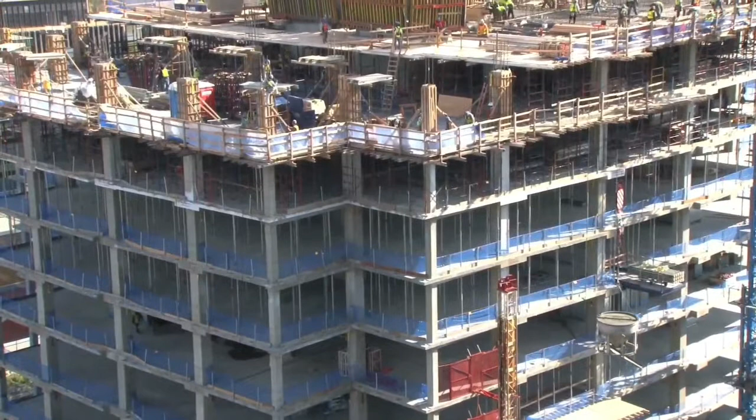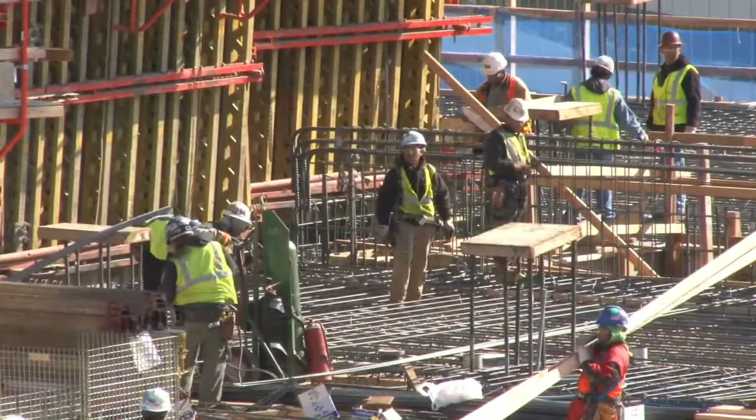As the world's population continues to grow, we're faced with the need for faster development and rapid construction on a massive scale. The building design and construction process has relatively stayed the same for hundreds, if not thousands of years. An architect or designer would create a vision for a structure, a civil engineer would create all the necessary supports and functions, and a crew of builders would ultimately construct the house or building. It seems simple, but one thing that the tried and tested process doesn't have on its hands is time.

When time and efficiency become the driving constraint for construction, like what's being seen in areas experiencing rapid growth, oftentimes the only solution is manufactured housing lacking in originality and architectural beauty. There is a place for a double-wide or single-wide concept of manufactured homes, but adapting to the mass population has never been the intended use.

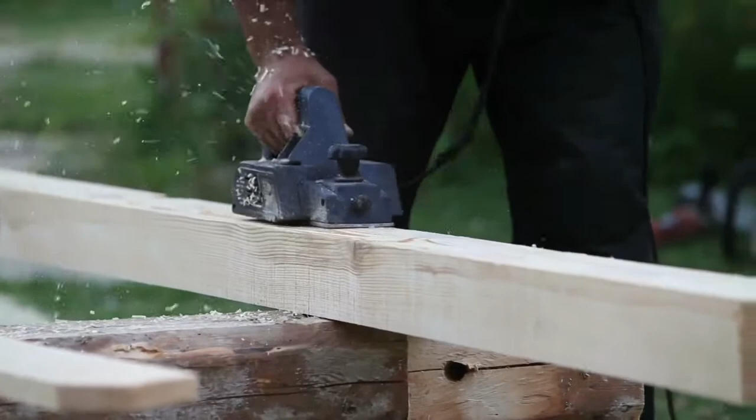Rather than this form of housing manufacturing, the construction, design and construction industry will shift to a more wide-scale mass production industry. We're already seeing trends of this emerge, like when China had to build a hospital in record time. They used prefabricated wall structures leaned up together to create one building as fast as possible.

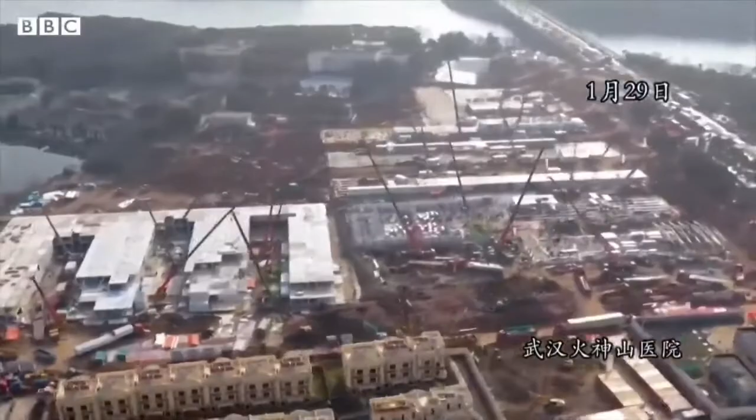That said, the buildings traditionally made in these prefabricated structures are rather boxy and not very interesting, but the industry will soon come to see that one can still be focused on architectural beauty and originality, while the processes can be driven by manufacturability and speed.

Much like how 3D printing and other additive techniques are infiltrating the mechanical engineer's world in product design, so too is rapid prototyping infiltrating the construction industry. There are any number of ways one can create a structure using scalable components.

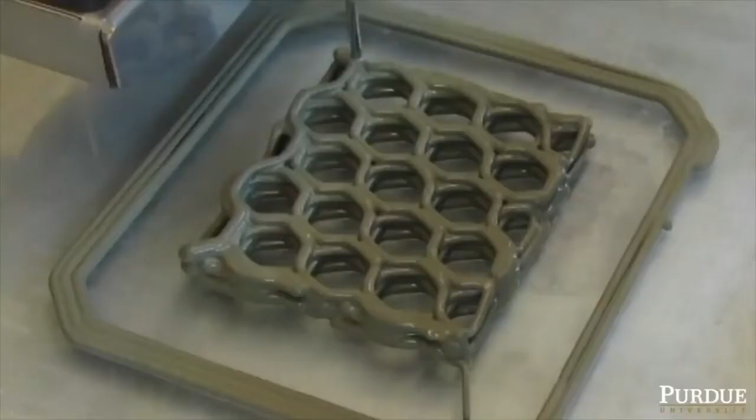Buildings can utilize large-scale concrete or brick house 3D printing machines, although their practicality for widespread use is currently still lacking. What the world will start to see is more of a system of construction building blocks, a standard, if you will, for fully custom construction housing, all using similar pieces.

This slowly emerging trend in the construction industry is further picking up speed. We're beginning to see skyscrapers built in a matter of days and weeks, as opposed to years using traditional methods. The trend is becoming pre-manufactured, somewhat uniform structural sections used in large-scale construction projects.

Most notably, we see these pre-manufactured part methods being used in places like China, like we mentioned before, where the population is experiencing exponential growth.

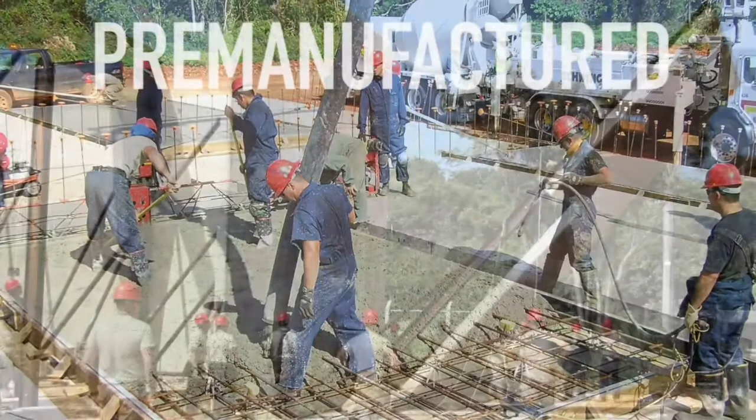For the better part of history, construction has relied on the trades, bricklayers, masons, builders, and many others to bring an architectural design into fruition. Not to say the trades are dying, in fact quite the opposite. But rather, when time is a driving factor in construction, there simply isn't enough time to rely on human tradesmen.

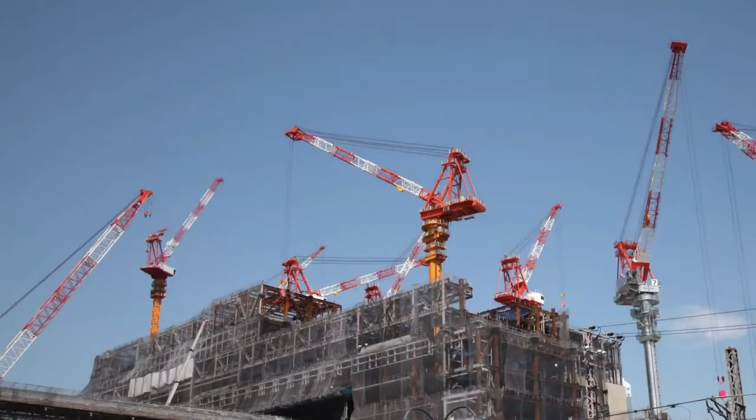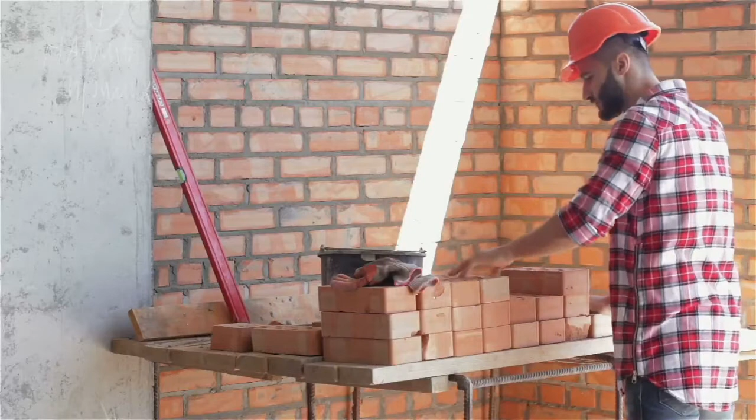Engineers and builders are turning to construction techniques like tilt-up building, where walls are cast in large slab sections on the ground and lifted into place. This technique allows sections hundreds of feet in length to be raised in a matter of hours.

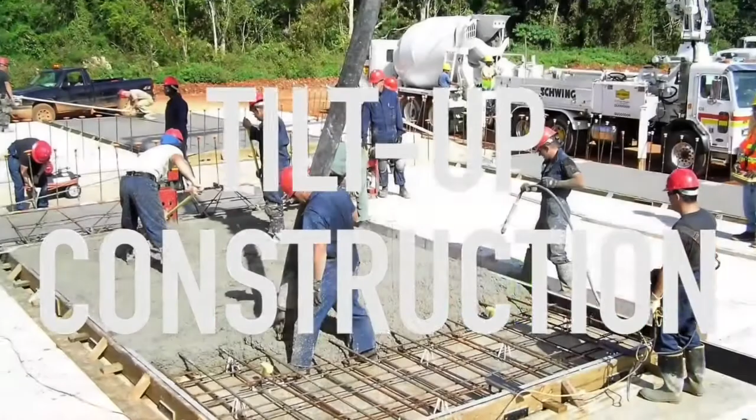The key to understanding mass production techniques being implemented in building construction is that even though time is becoming a driving factor, buyers still want originality. To adapt to this, construction techniques are using styles similar to how one might play with Legos. There are standard sections and methods that ultimately fit together easily to create a greater structure, but therein can be customization.

As large-scale 3D printing techniques for buildings mature, the industry may start seeing more designers utilizing these methods. In terms of feasibility, additive techniques have been proven on a small scale, but sizing up the methods to the size of a house or office building is another matter entirely.

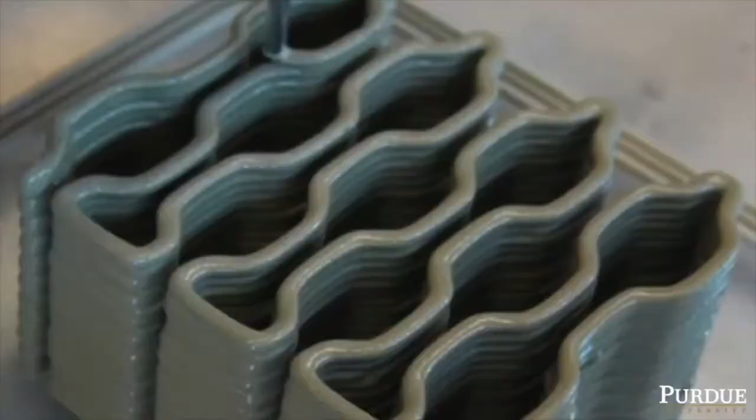Much like how the Industrial Revolution created a variety of processes that sped up the manufacturing industry, so today we're going to start seeing a construction revolution, which is speeding up our ability to engineer dwellings to meet the growing population and need for new structures.

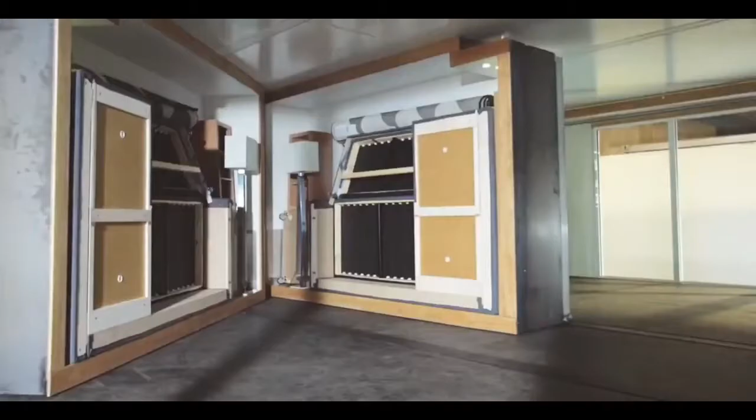The residential new construction sector, which includes single-family as well as multifamily, is forecast to slow down by the early 2020s. The multifamily industry projects the slowdown to be at least 30% of the total starts.

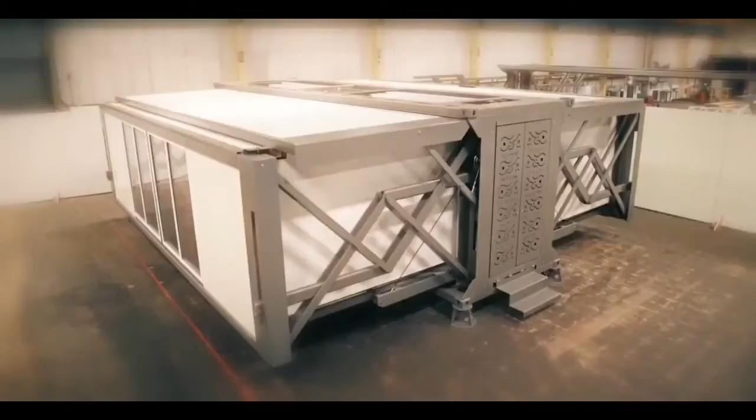While we're all happy that starts continue to grow at least 5% every year, loading our manufacturing lines, the trend is about to change. One forecast to keep in mind is that the repair and remodel (R and R) sector will continue to outpace new construction, as there continues to be untapped potential.

As you put together your strategic plan, make sure you're preparing for the new construction softness by immediately putting additional resources on R and R.

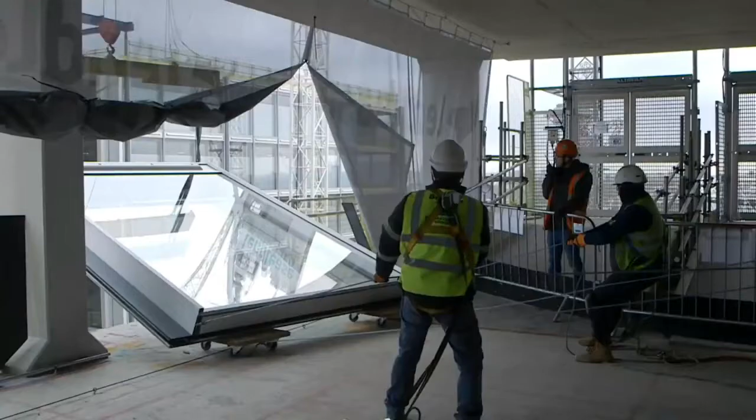You have no one to blame if you don't listen to and address the looming signs. There are 9.6 billion reasons we should be thinking differently about the housing industry.

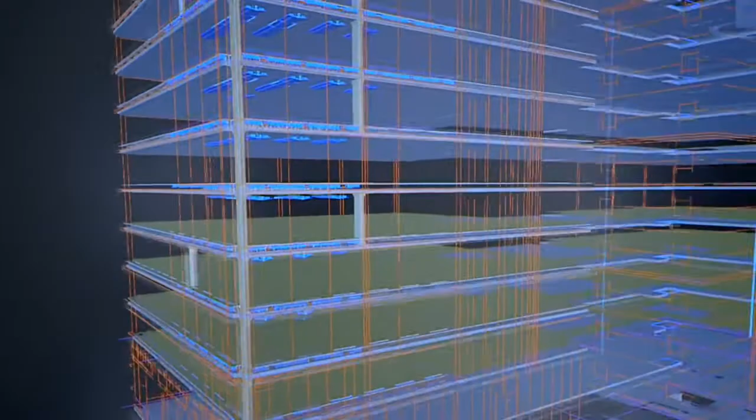By 2050, it's projected that more than 2 billion people will be added to today's world population. In the US alone, our population of 328 million is forecasted to increase every year by 2.3 million people until 2030, surpassing 400 million sometime shortly after 2050. To house these additional people, we will need nearly 800 million more housing units across the world, assuming a current 2.6 people per unit average. In the US, the 72 million incremental population growth will require 27 million more homes, not including homes that deteriorate to be non-occupiable within that roughly 30-year timeframe.

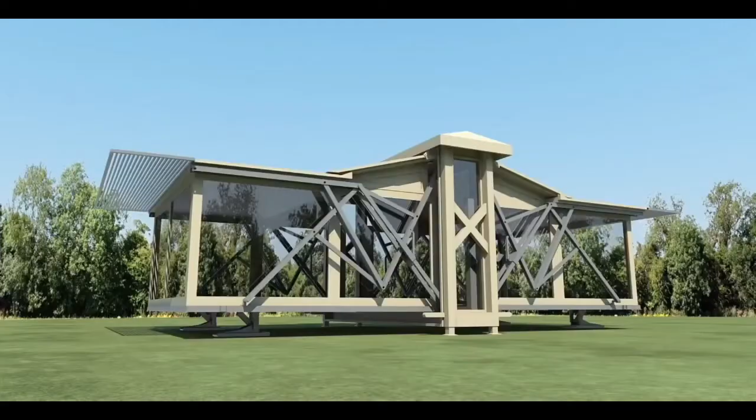Today, the US struggles to find enough labor to even build 1.3 million homes and remodel several million more. And we currently struggle to find the land for builders and developers that can afford to develop it.

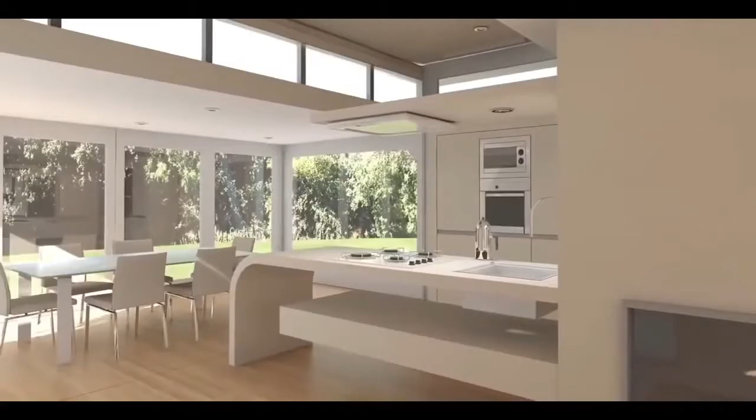I learned early in my career, focus on what you can control, and it will make solving the challenge easier. We know there is nothing we can do about the population growth, unless we take China's approach. That's why we must address the approaching housing shortage and make it part of your long-term strategic planning process, so you can address how to leverage the opportunity it will most definitely create.

Land is available in certain locations. The industry just needs to identify how people want to live. It's forecast that multifamily, especially in urban living environments, will continue to grow. By definition, this means that multifamily housing will increase given the landlocked areas available in urban locations. Experts forecast that mix to continue and perhaps grow with the changing demographics on both sides, including more boomers downsizing to walkable communities and more millennials wanting less square footage and walkability to shops and entertainment.

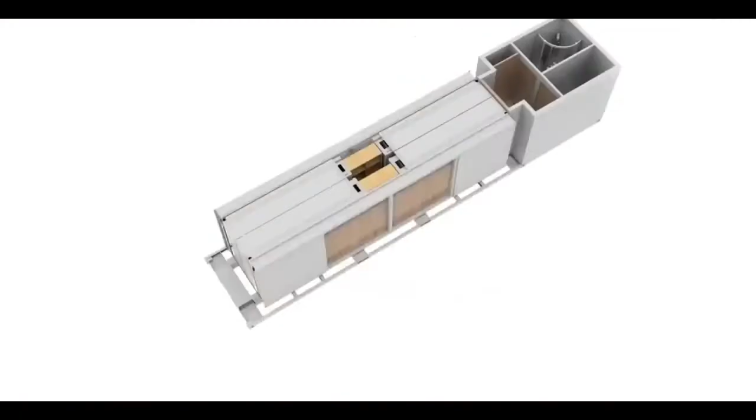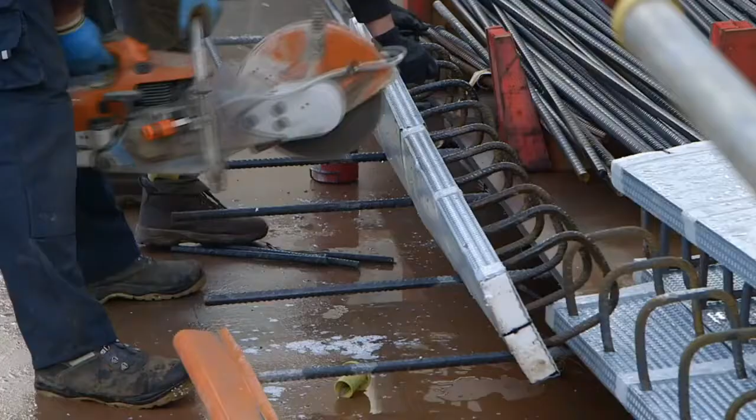There is immense innovation happening in the construction industry, and with new technology hitting the market constantly, there is a large opportunity for growth and an increase in productivity. Various roadblocks keep the industry from adopting these technologies more readily, but their hesitation can largely be attributed to the upfront investment that comes with implementing new technology.

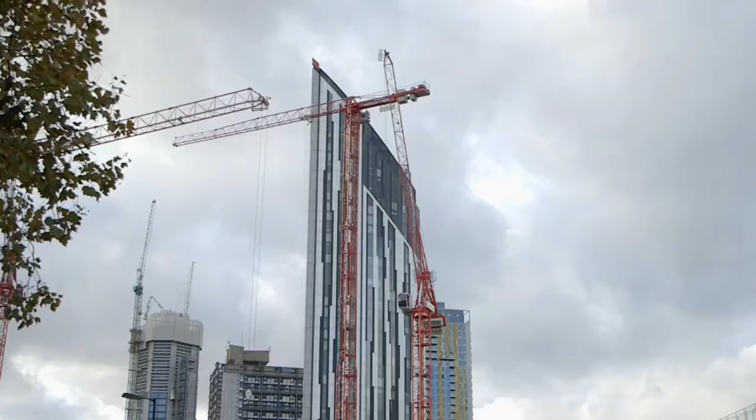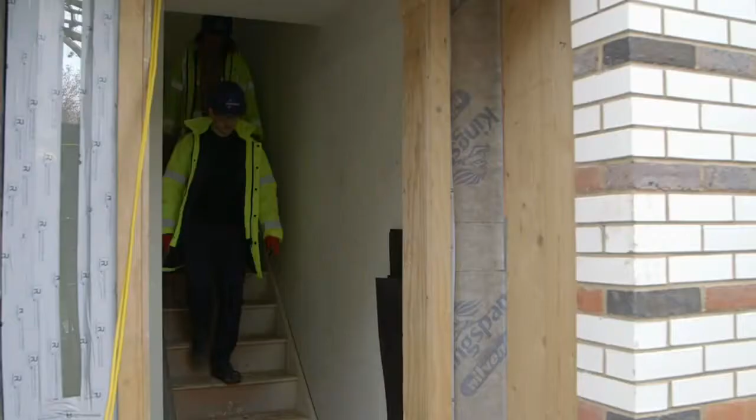Within 10 years, according to our estimates, full-scale digitalization will lead to huge annual global cost savings. For non-residential construction, those savings will be $0.7 trillion to $1.2 trillion, 13% to 21%, in the design, engineering, and construction phases, and $0.3 trillion to $0.5 trillion, 10% to 17%, in the operations phase. Note that the productivity gains will vary not only across the life cycle phases, but also across the subsectors: vertical, industrial, and infrastructure.

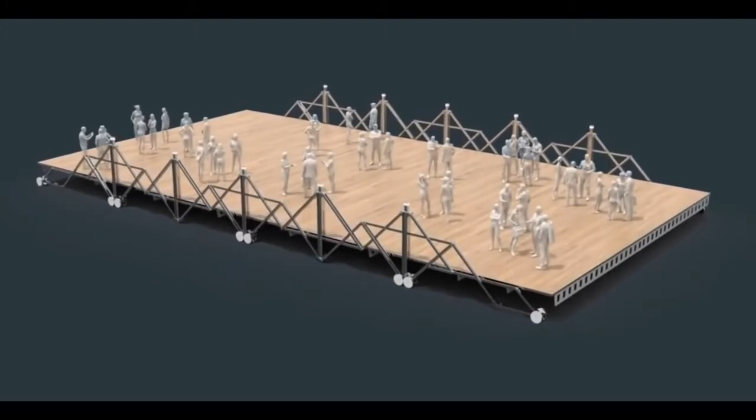To understand the present and future of construction technology, it is best to understand the seismic shift in technological adoption over the past few years. According to McKinsey & Company, investment in construction technology has more than doubled in the past decade. McKinsey found that investors put $25 billion into engineering and construction technology from 2014 to 2019. The industry saw approximately $8 billion from investors from 2008 to 2013.

That influx of money is partially responsible for the rapid rise of building information modeling, BIM, a technical tool that makes it possible for buildings to be rendered digitally and allows A/E/C professionals to more efficiently design, build, and operate an actual building itself. BIM is essentially a digital twin of the project, Berger said, and it represents a working model on the job site that the foreman and superintendent can interact with to help reduce project risk.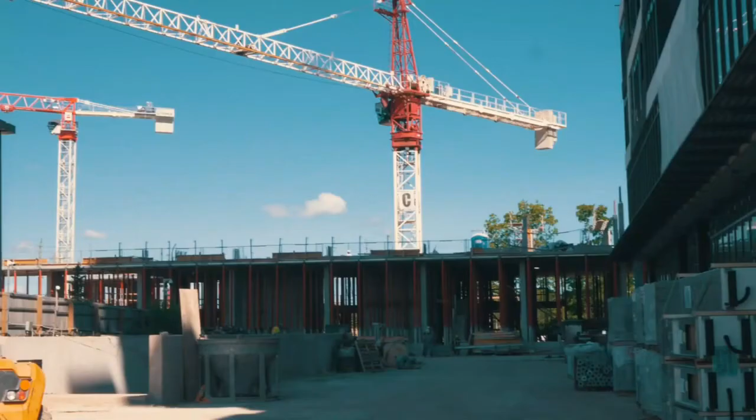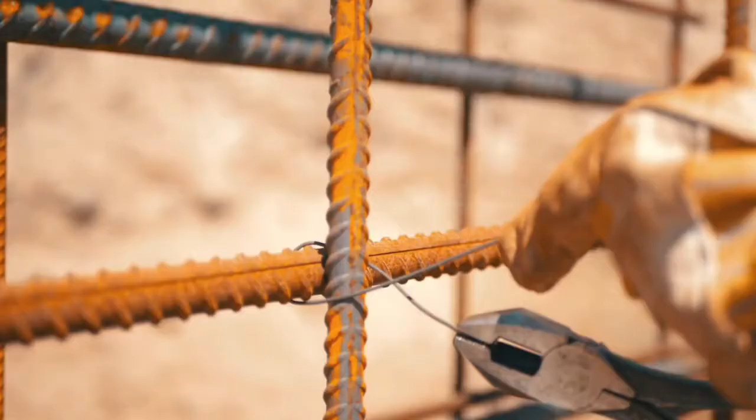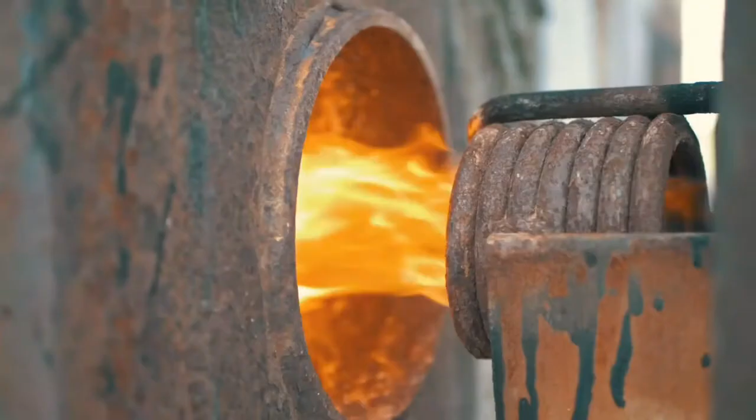Today's construction industry is quite different than what existed just a few decades ago. These days, it is much less common to see workers hauling around rolls of hand-drawn blueprints, punching numbers into printing calculators, or fiddling with slide rules. Records and plans are now created and stored digitally. Workers use new, more efficient tools, and many on the construction site are equipped with various types of smart devices and handheld technologies. The workforce demographic makeup looks different too.